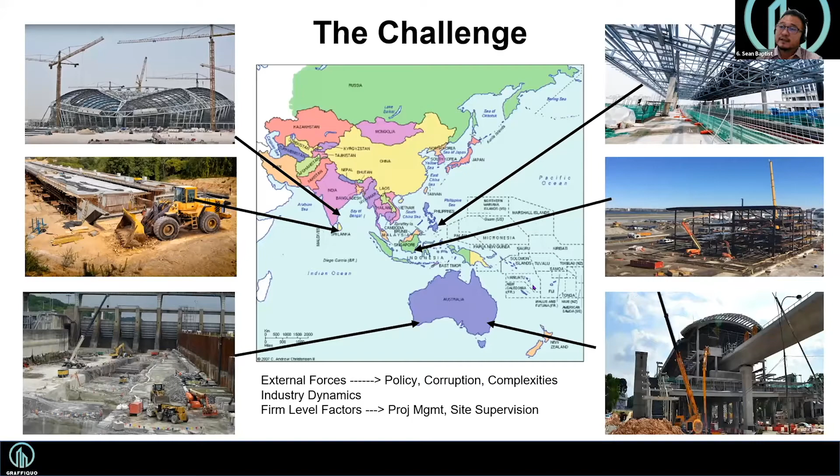Put that into perspective, right? In a construction project, there's so many moving parts because you're trying to manage a whole lot of resources to produce your goal, on top of that, with all these external forces.

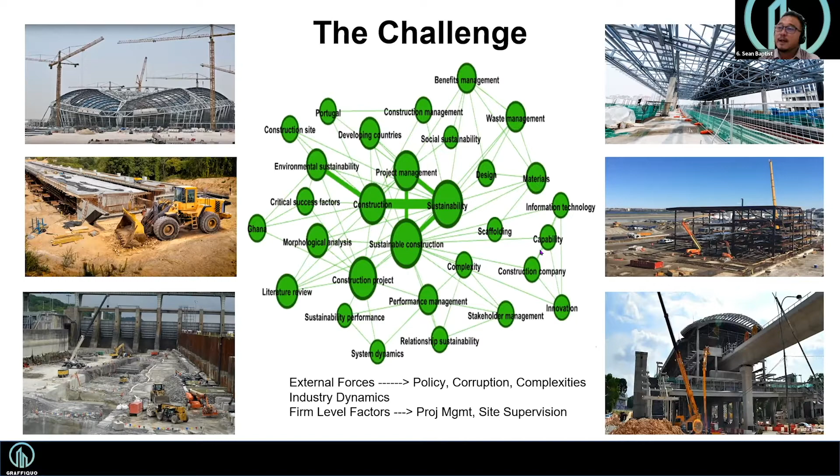So what is it that we are looking for? Basically, every construction site needs to manage documents, needs to manage lots of Excels, plan printing, and on top of that, time management of scaffolding material, utilization of material, and prefabrication, as we heard from the speaker from Nanya. And if you're in multi-locations, that adds a complexity of geography, policy, and local regulation.

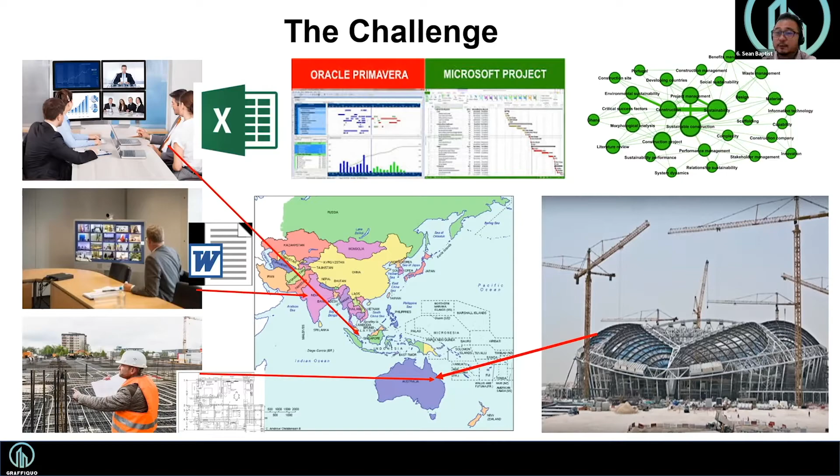Now, what would be nice? If you were running a construction, you want to be able to put all of this data into a single view by project or by category so that you can have this information. But having a human being try to put this information together is very tough, very long, very tedious, and many a times error prone. So we need to utilize the capture of AI or robotics to automate and make some of these activities simple.

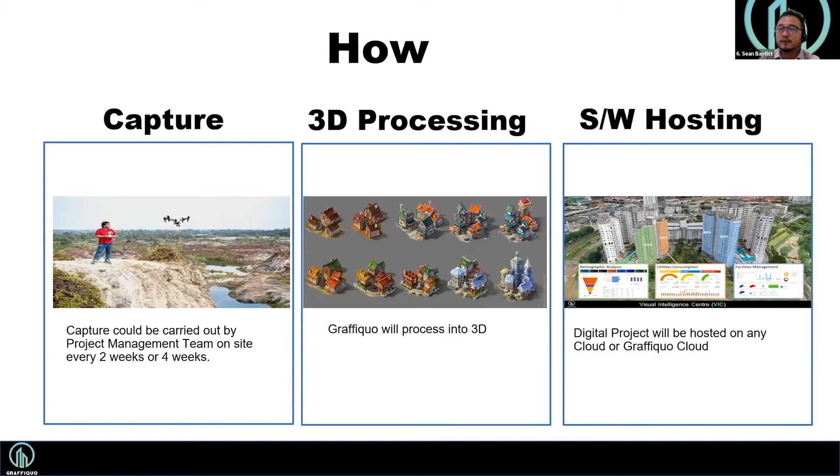And how do we do that? It's a multiple process of technology. First, we utilize drones to capture pictures. We process these pictures into 3D, and then we host those pictures in 3D so that you can utilize that. The output of that basically provides what we call a construction digital twin, where we can reproduce the physical layer and then layer the digital information.

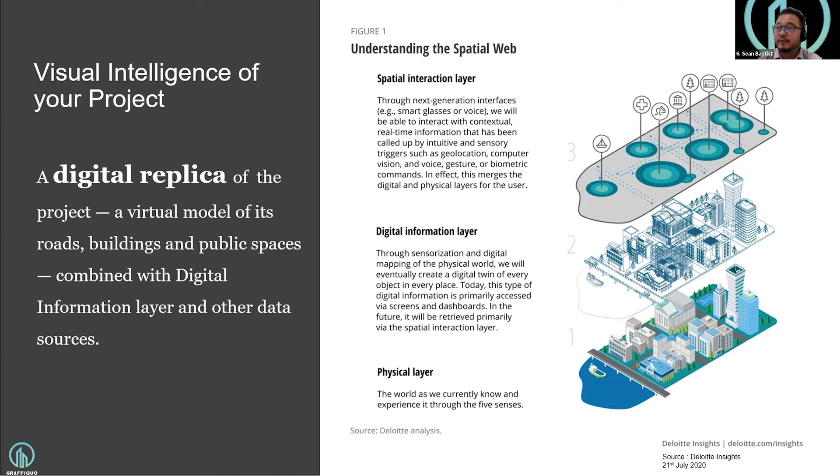And this could be your Excel sheets, this could be the drawings, this could be your BIM, this could be your layout, this could be the architect's impression or the elevation diagrams. And then layer on the spatial layer with sensors, and these are the IoTs, the sensors coming from the robotics, from the 360 cameras that collect information. Now, with all of that put together, what we will create is something like this.

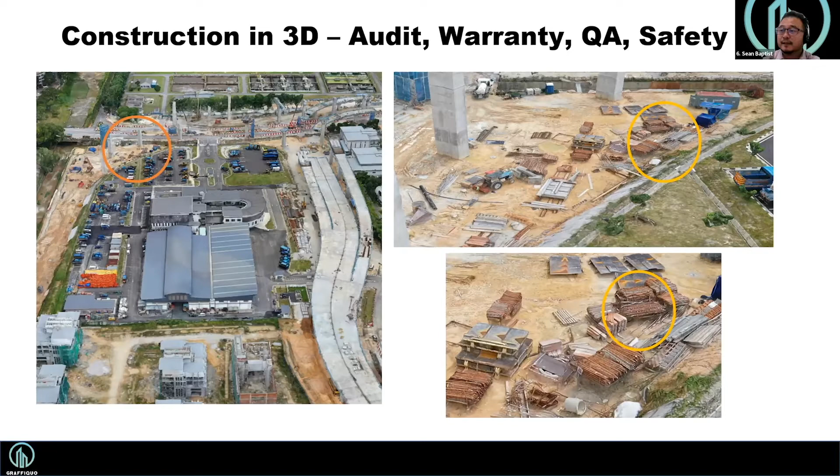Because of the type of technology that is now available in conjunction with some AI, we are now able to calculate material. So if there's steel being delivered, you can automatically calculate from this picture how much of that steel was utilized over the last 2 days, 3 days, 5 days, how much was delivered, and over a period of time, how much was used. And you can calculate pilferage if there's any happening on site due to the level of detail that's possible.

Now, in a construction, of course, you're trying to project the concept of, okay, this is what we're trying to do, this is where we want to put the material, this is how we want to organize the construction site. And all of this information can then be organized and displayed on a digital twin of the construction site. And then this can be shared with the whole construction, contractors or subcontractors that are part and parcel of running the project.

So every site has multiple subcontractors that's running concurrently. So what we're trying to do here is to make sure that everybody has the same view of what's happening or what they need to watch out for, what are the safety aspects that need to be run.

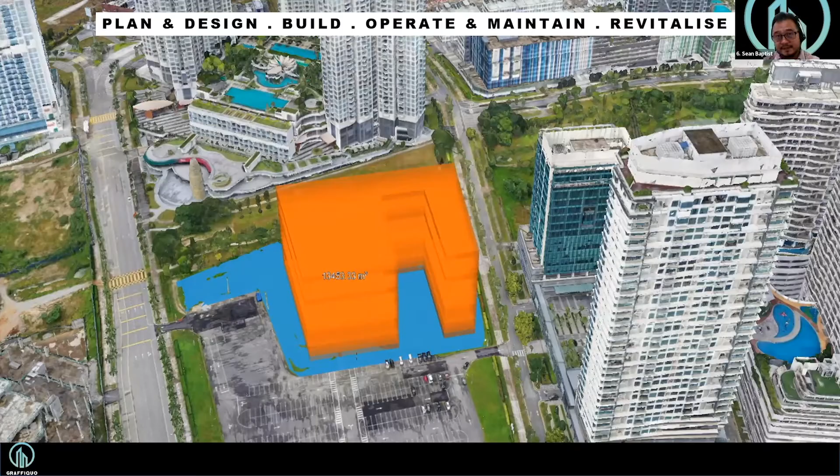We also can use this as a view to try to tell what the future looks like when the construction is ready. And therefore, this is what we need to be preparing for. So the view of the future based on architect's impression.

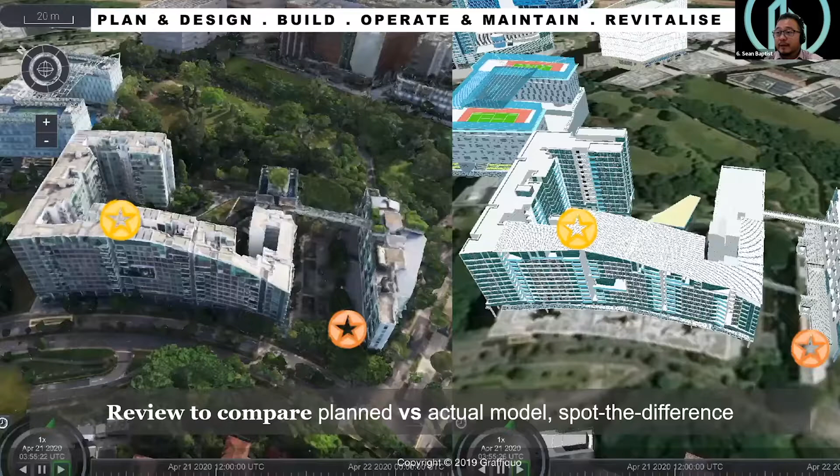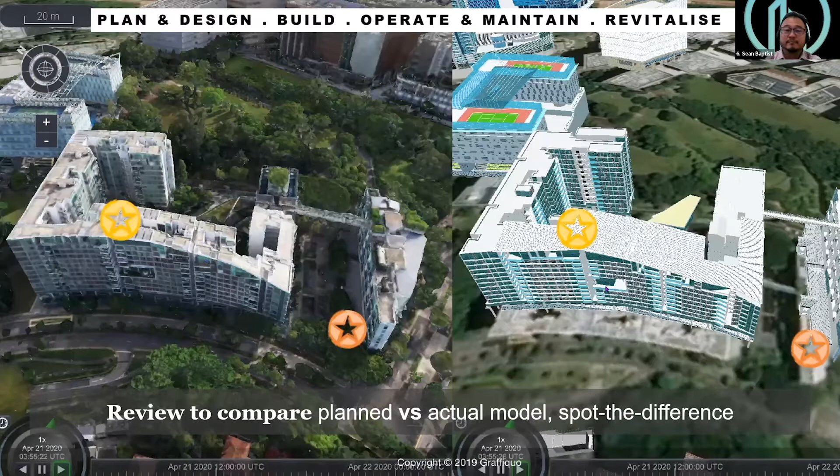We can also, as construction is progressing, review the plan versus the as-built, not just at completion, but as it's being built. Utilize AI to determine what has changed from the plan versus what is being built. Are we in sync? And that can be done week on week or month on month or every 2 weeks, depending on the schedule and speed of construction.

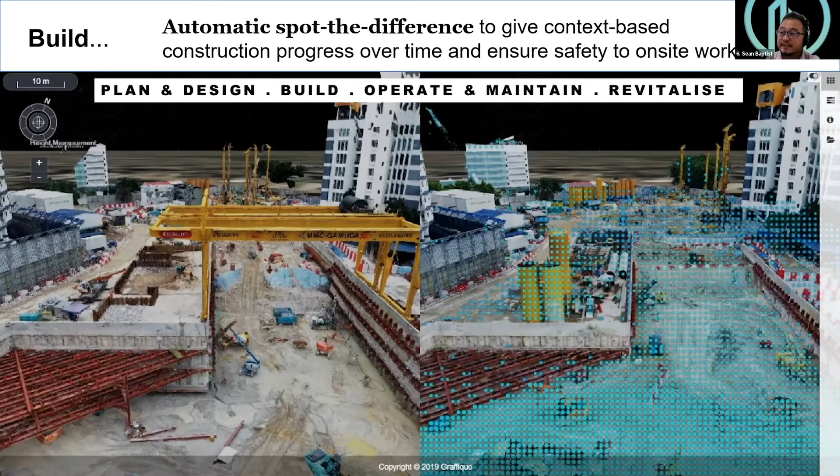Now, if we use some AI to monitor construction, we can also zoom in, looking at the construction site, but layer this with IoT. So in this case, we layer it with some form of a sensor, which could be a CCTV, or it could be a movement sensor or weight sensor, or a whole lot of stuff. And then from there, review the activities that's taking place, so we can oversee if there are any accident prones or any incursion in safety protocols.

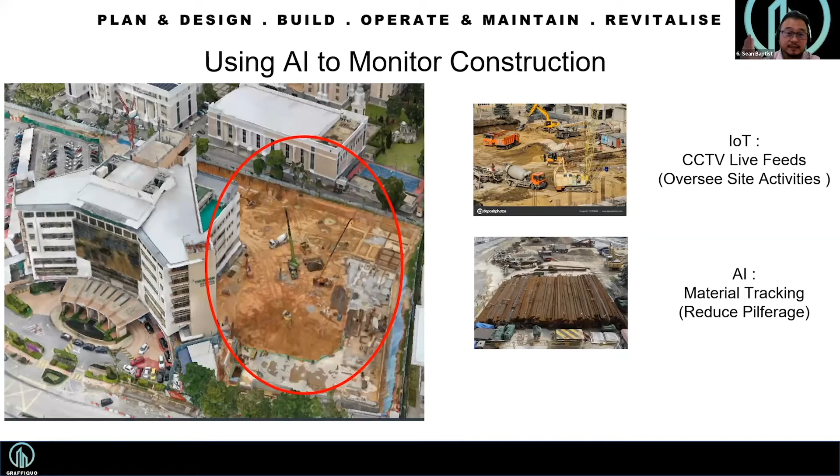Or using AI to measure the delivery of material, monitor it, and the utilization of this material to understand where pilferages may have taken place, or whether the constant utilization of this material is according to plan.

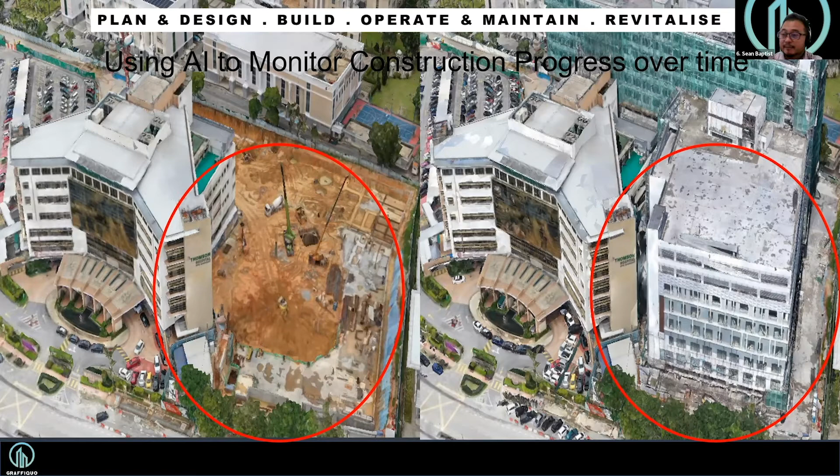And over time, we can again use this AI to monitor the changes. So in this case, on the left, you will see a picture of a construction site just starting, and on the right, the completion of that construction, over the next 24 months. I'm just showing you the extreme from 0 to completion, but it can be a weekly capture, it can be a monthly update of how the construction looks like over time.

Or it can be as simple as looking at the defects, to maintain the defects register or the complaints register, and to ensure the workflow to the relevant contractors to fix these problems. Now, instead of just using the layout plan to identify, we now can use actual pictures to identify the problem that needs to be remedied or that needs to be adjusted.

Or utilizing our AI tools to identify whether the safety measures have been implemented correctly. So, the safety protocols or measure of these nets, the drop catch nets, as part of your safety measure.

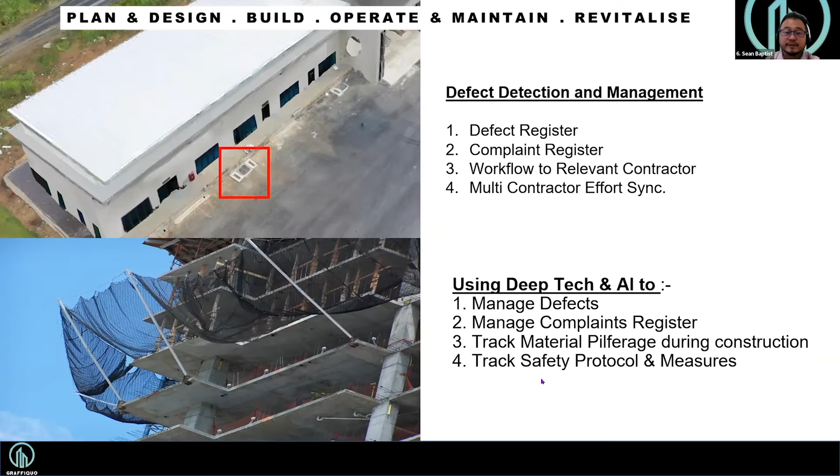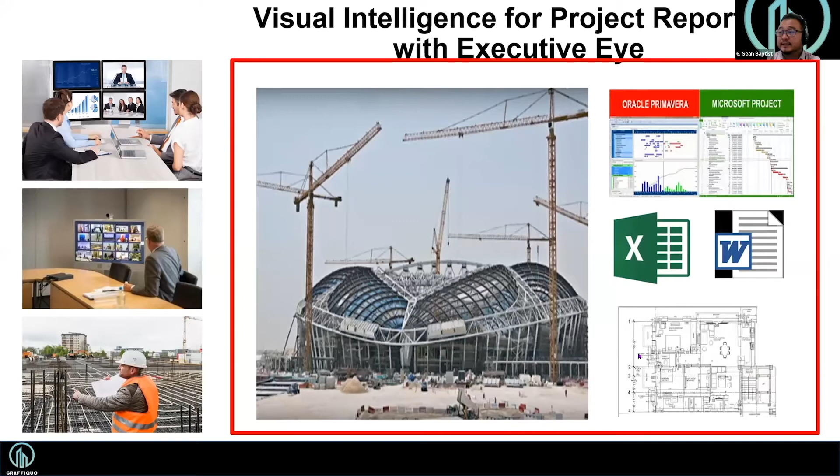In order to look at all of this, we partner with Executive Eye to pool all of this construction information and the complexity of managing documentation, protocols of construction, as well as the processes, drawings, and materials that are part and parcel, to provide this final dashboard that construction site managers or owners would like to see, where it's not just a static piece of paper but an interactive visual that tells you these files have been used, these are the locations, and you can zoom in and out and virtually feel as though you are on site.

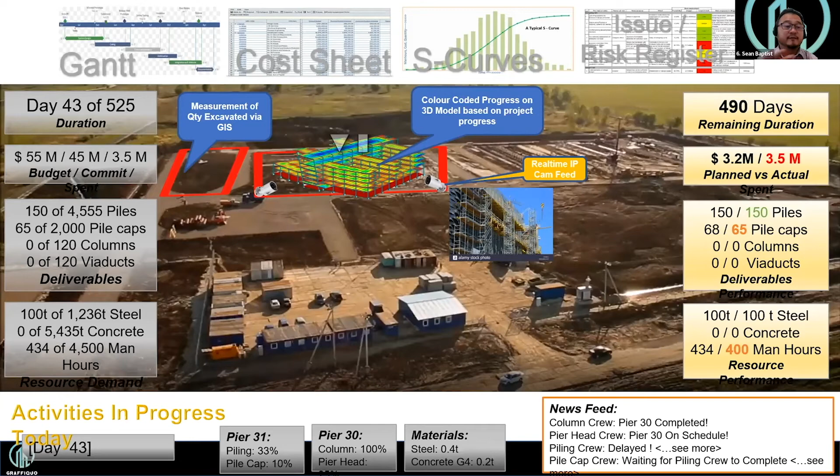This allows construction managers, supervisors, or site supervisors to manage multiple sites without needing to be on site. It's like Star Wars - you can beam these site managers to all the different sites as and when required, so they can get a feel of what's happening at that site this week, in two weeks, three weeks, or what happened five weeks ago. Because if an accident has happened today, we want to review whether what we did five weeks ago was according to plan, and they can review that as part of their audit measure.

Some of the projects we have done span a whole lot of different areas, mostly around contractors for the MRT lines as well as for cities. What I'd like to share with you now is a short video to give you an idea.

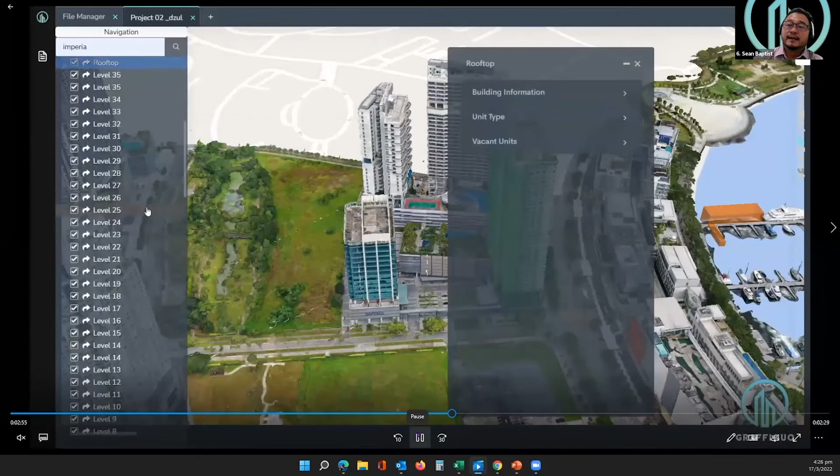What I showed you just now was really lots of static content. Now I'm trying to bring the flavor of how this 3D visualization will look like in a construction and a completed environment. So in what you're seeing on screen...

Oliver, if I could just check, if you nod your head if you see the video running.

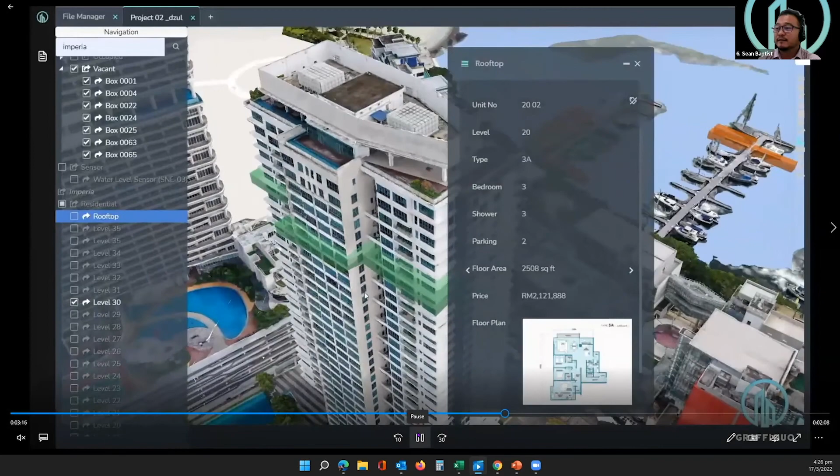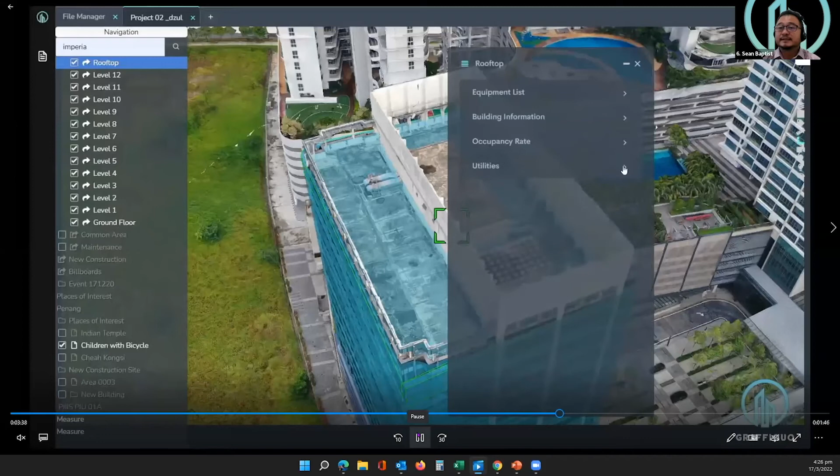Yeah, okay great, thanks. So there's a whole lot of data that can be filled in as you are watching, identifying the location, the layout, the floor. We can insert plans that are relevant, or even photographs or 3D images of the internals. This can facilitate, as the construction is happening, understanding what type of materials are being used, how it's being done, is it organized correctly, is the color coordination right - so if you want it done in a certain way, has that been done correctly before they plaster it up.

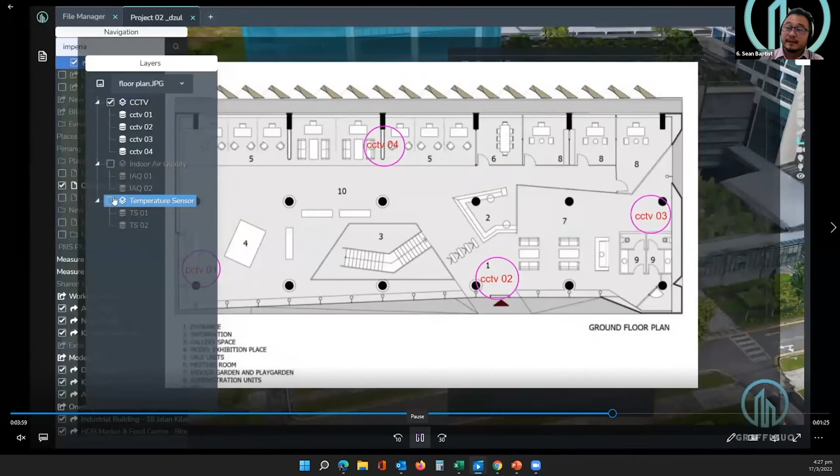In this case, we can layer this with multiple types of sensors that could be available, from temperature, CCTV, movement sensors, to fire alarms, and bring this data into the 3D model to make it come alive.

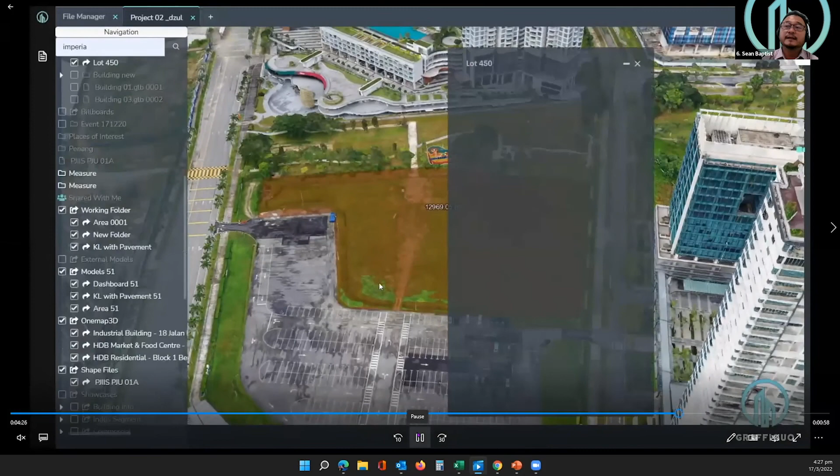In complaint management, we can integrate a complaint management system right into the view, so that you can provide the work schedule or work order to the relevant technicians to go out there and get the job done, fixed, and exactly understand where it is.

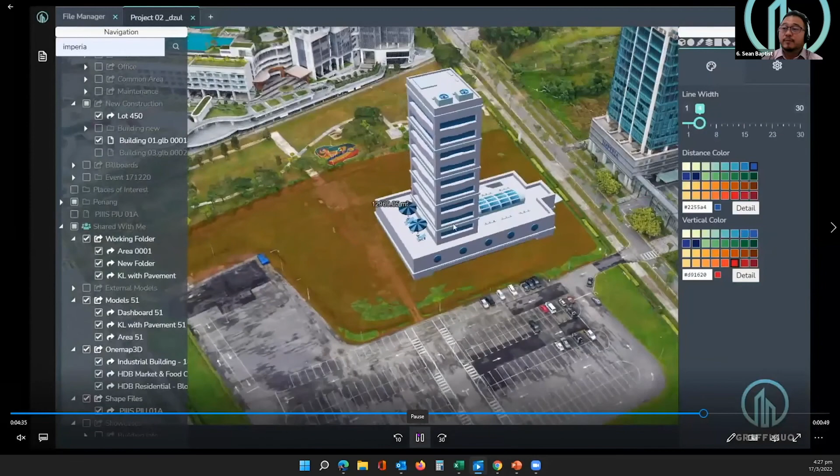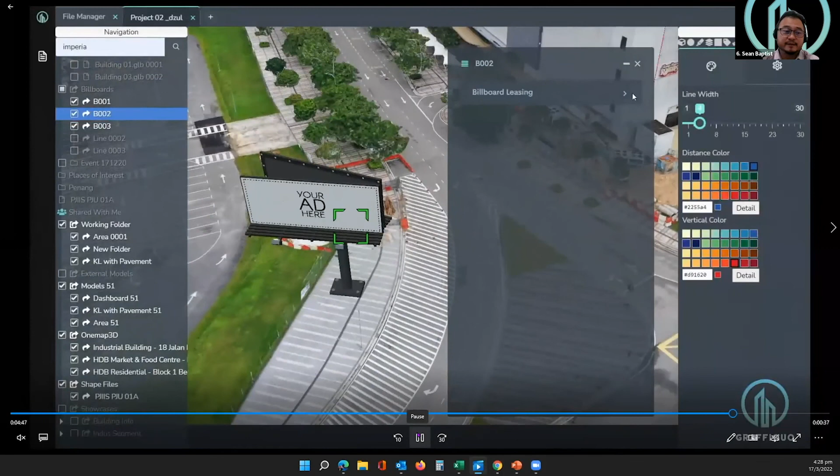If you are trying to plan a new building, you can identify where this building is, potentially where you want to put billboards, where you want to set up your material site, where you want to set up your site office. All of this can be pre-organized according to the real site, but done from the comfort of your office. Even like what we are doing today on a Zoom call, we could have 20 people on a call and all agree on how this is going to be implemented.

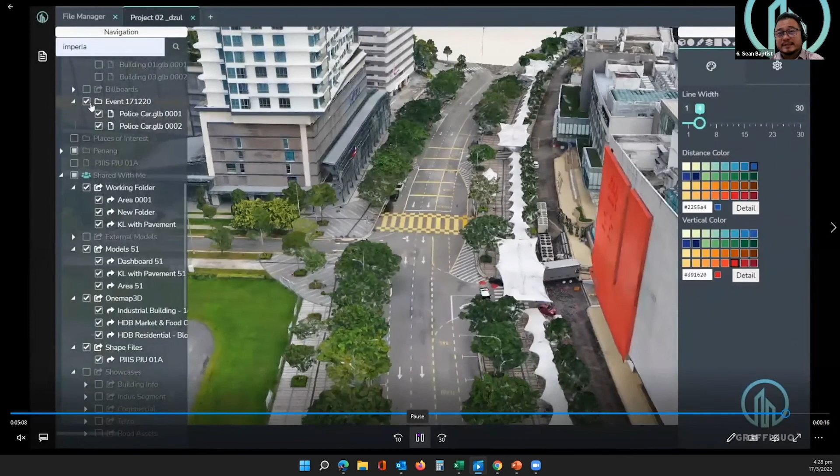As we know, a picture paints a thousand words. So using these pictures to get that message across eliminates any ambiguity, any miscommunications, and ensures the job is done correctly, swiftly, and efficiently.

And so with that, I'm going to pause my presentation and take any questions.